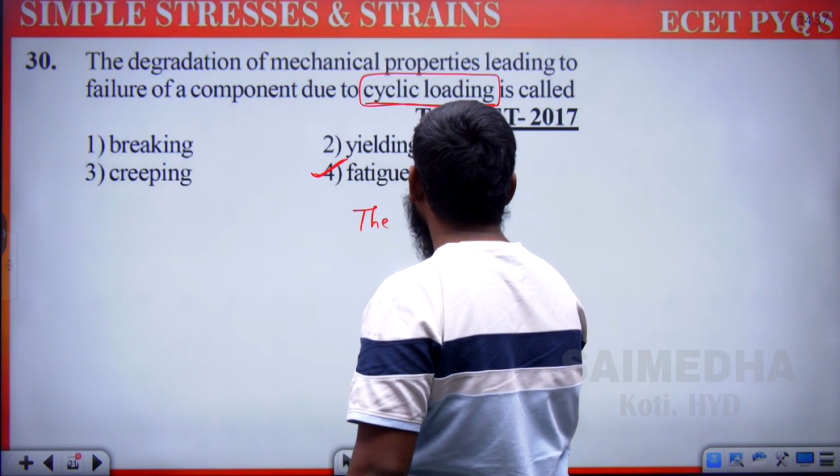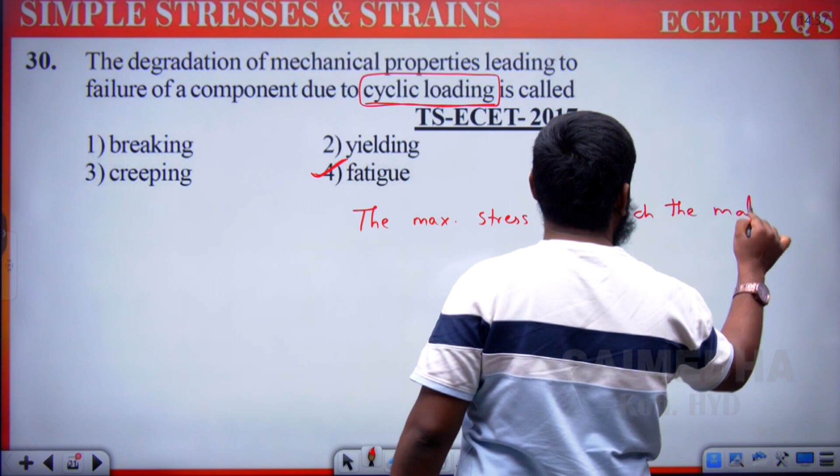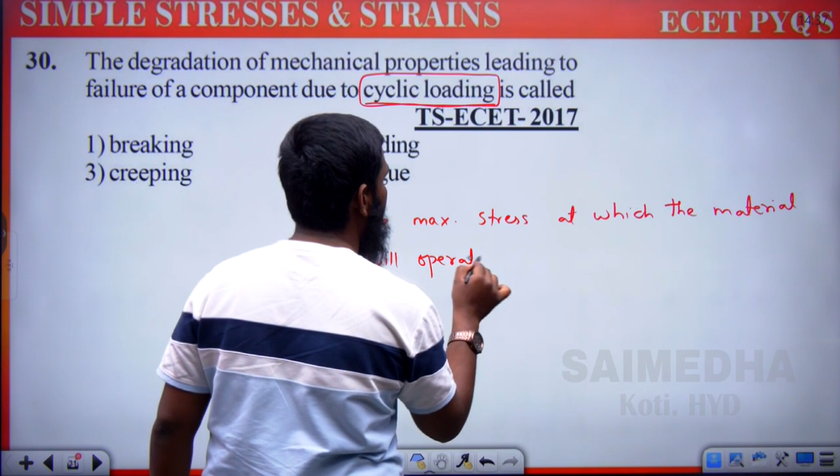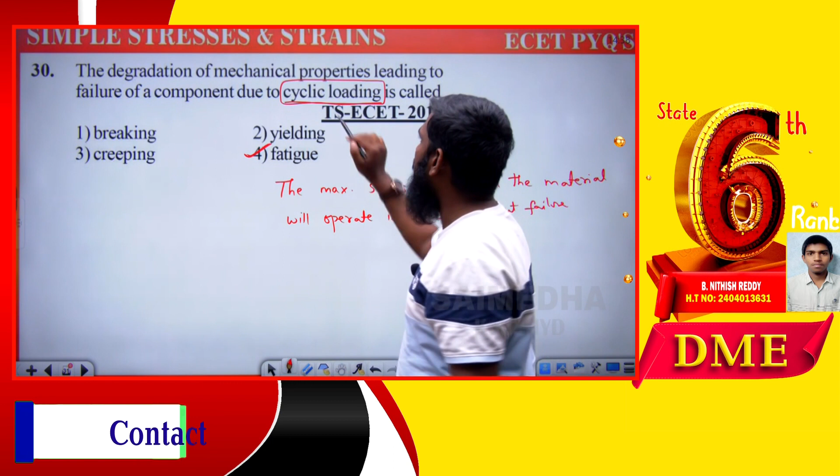We are calling this property fatigue. Or else we can remember the definition - fatigue strength. What is the definition of fatigue strength? It means the maximum stress at which the material will operate indefinitely without failure. Whatever this maximum stress is, we can write this as varying loads will be there. If you remember this definition, sometimes it will be given as varying loads, or if you have it as cyclic loading, whenever we have cyclic loading, directly we can go with the option fatigue.

Now let us go for the next question. A body having similar properties throughout its volume is said to be what? Now what we are having here is a body having similar properties throughout its volume. Suppose let us take an example.

Now we have taken a body as an example. In this direction let us take it as E1, this part we take as E2, and this part we take as E3. Similarly, one more point we take in this, we take it as E1, this is E2, and this is E3. So we are having the same elastic properties here.

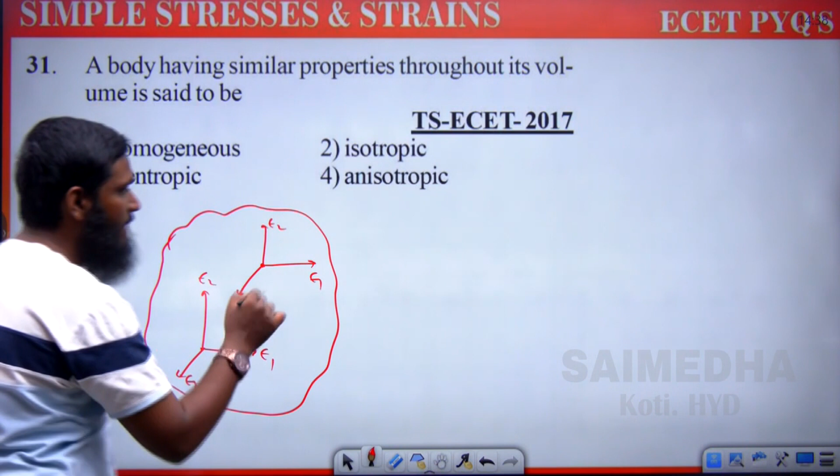We are having the same elastic properties in the direction. So it is depending on the direction but independent of the point. So it is similar properties we are having, having similar properties throughout its volume, so it is related to the homogeneous part. If this sentence is given - we are having the same elastic properties depending on the direction, independent of the point, or we are having similar properties throughout its volume - then we call it homogeneous. Isotropic is different.

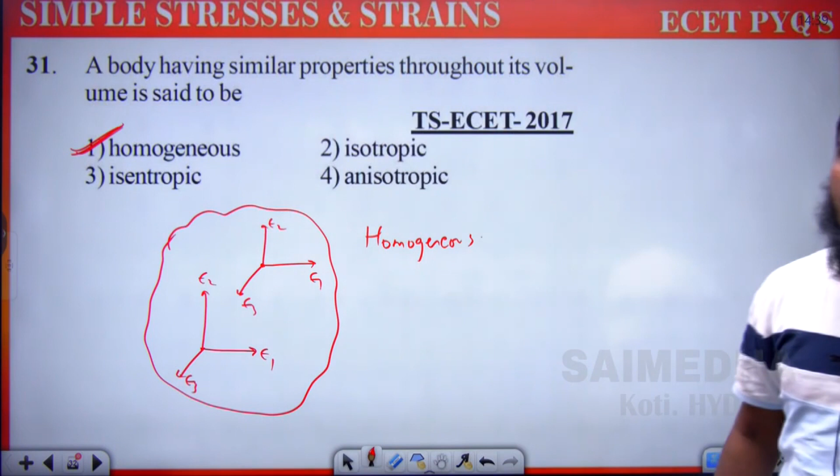We are having same elastic properties in all directions. Whenever we have same elastic properties in all the directions, then we call it isotropic.

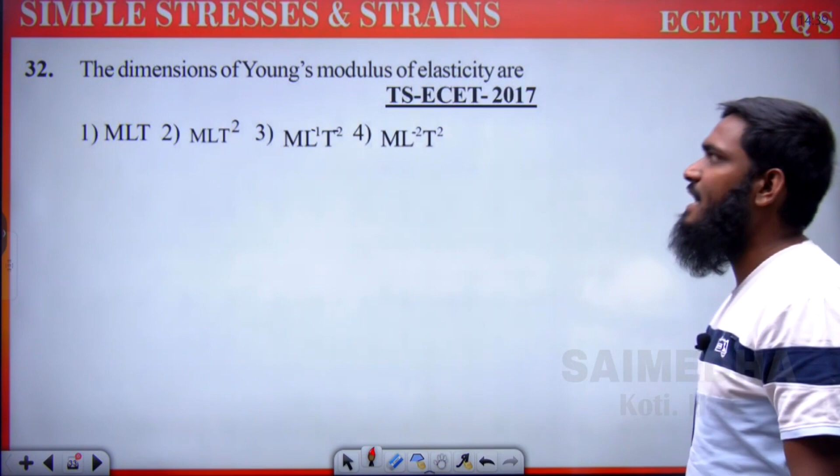Now next, the dimensions of Young's modulus of elasticity are - let us see this one, what are the dimensions. So Young's modulus of elasticity, what is the unit we are having? The unit we have is Newton per meter square.

Okay, so we have written the new units. After writing the units, with the help of the units, let us try to find out the dimensions we are having over here. Newton per meter square we have taken, but 1 Newton is equal to how much? 1 Newton is equal to 1 kg meter per second square.

What we are having? 1 kg meter per second square. Now let us substitute over here. In the place of Newton, we are writing 1 kg meter per second square. Then again in the denominator only, what we are having? Meter square we are having. So let us write this part as meter square.

Okay, so this 1 meter gets cancelled. Now what we are having? Kg we are having in the numerator, and in the denominator we are having meter and second square.

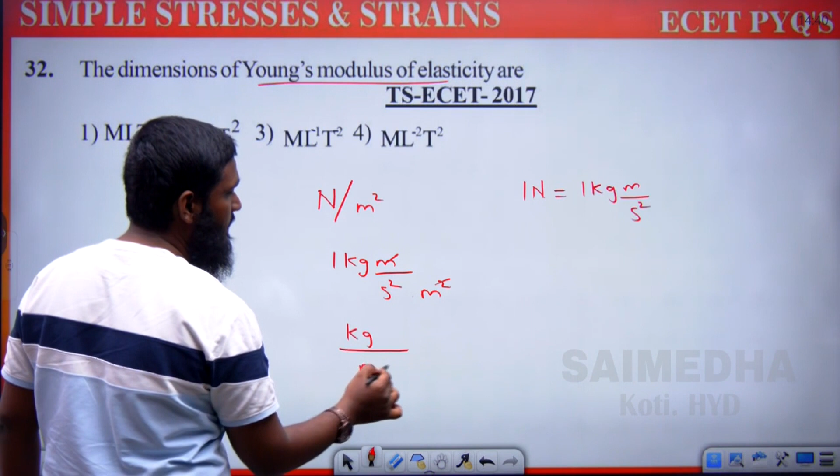Okay, now let us try to write this in mass, length and time over here. Now what we are taking? Kg means what we are having? Mass. So we have taken mass over here. What is the power we are having for this mass? Means 1. So we have taken 1 over here.

Now next, m we are having. M means what we are having over here? Meter. So if you are having meter, we have to take length. So we have taken length over here. But what is the power we are having over here? M power 1 is there. But if you want to write in the numerator, it will become L power minus 1.

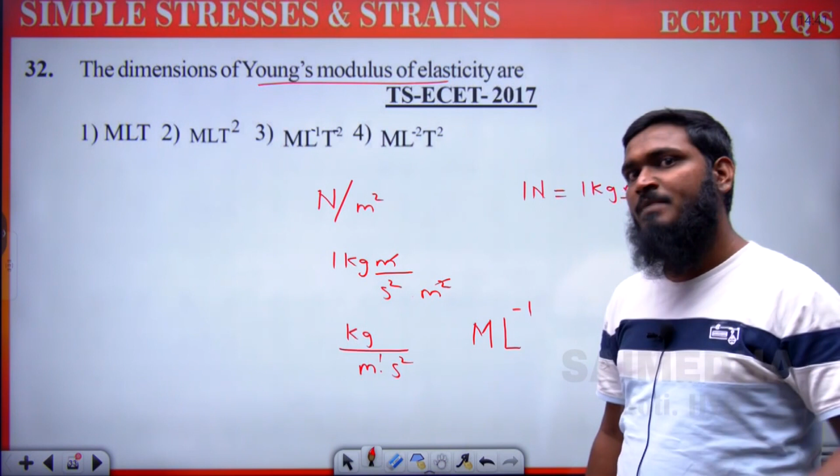Similarly, now S means what we are having? Second. Second square we are having. Second is related to time. So we have taken t over here. Now what is this number we are having? 2. Means if you want to write in the numerator, it will become minus 2. So these are the dimensions of what?

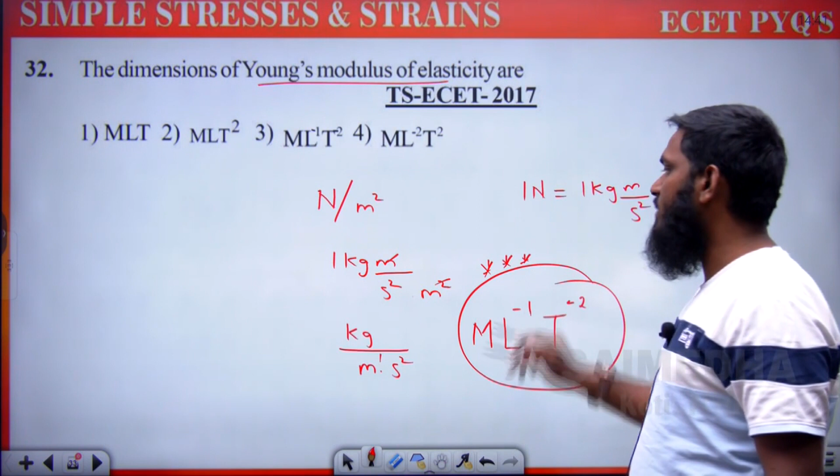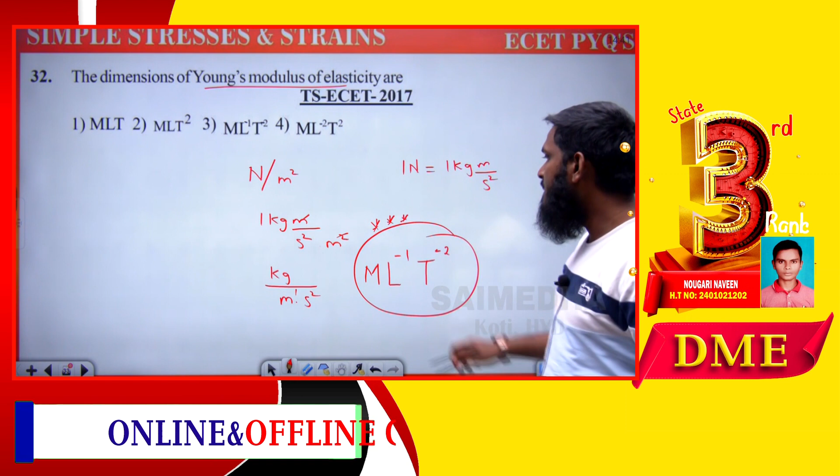Young's modulus or modulus of elasticity. So if you don't know the formula directly, with the help of the formula also we can write this part. So M L power minus 1, t power minus 2 will become the dimensions of Young's modulus. So which option is correct over here? M L power minus 1 t power minus 2. So option 3 is correct.

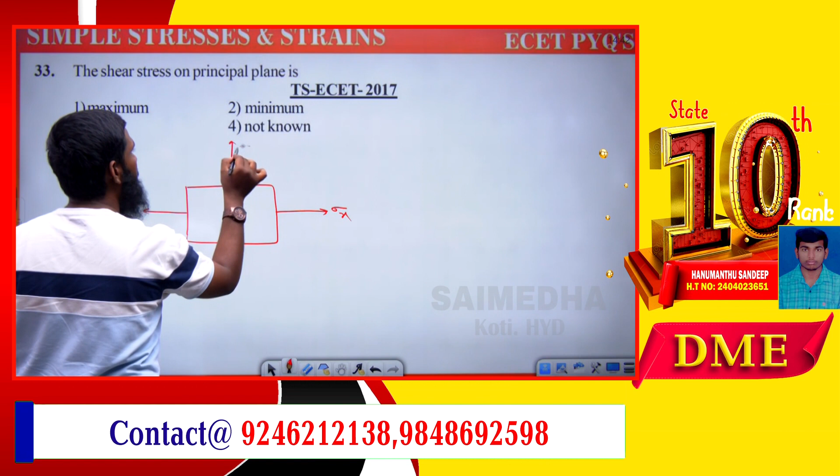Now next question, the shear stress on principal plane is - we have already discussed this part. Now listen here carefully. Suppose we have taken a body over here. Okay, this body we have taken. Now in this we are having normal stresses, sigma x we have taken, this is also sigma x. Now this is sigma y we are taking, this is also sigma y we are taking over here.

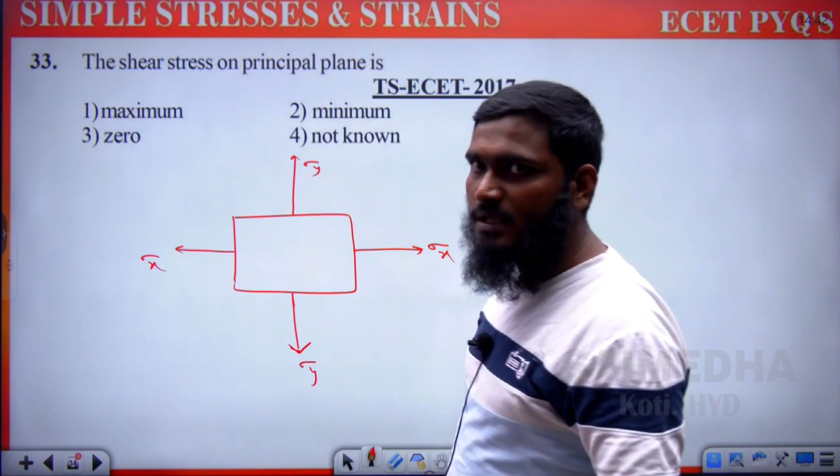What is the meaning of normal? Normal means which is perpendicular to the cross section. Yes or no? Perpendicular to the cross section means we have taken this part. Now if you are taking shear also, means shear means what? Parallel to the cross section. Parallel means what we are taking over here.

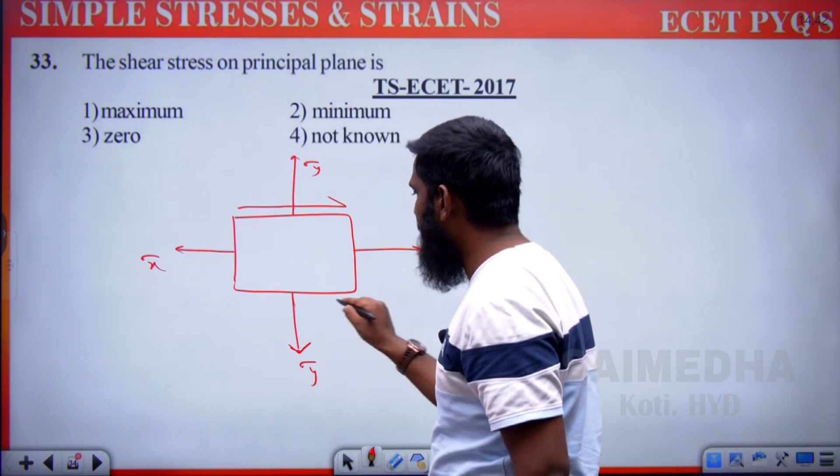Suppose we have taken like this. Okay, this part we have taken. So if it is moving in the right direction over here, another part we have to take as left direction. Okay, right and left we have taken. Now if you are seeing this part, right and left, so it is trying to rotate this body in the clockwise direction.

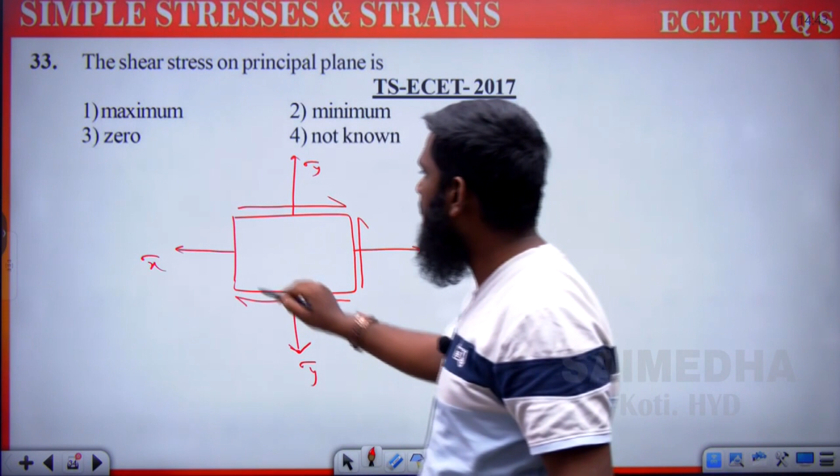If it is trying to rotate the body in clockwise direction, we have to provide the complementary shears which is opposite to that part, so the body will be in stable condition. Okay, so if it is clockwise, now we are providing anti-clockwise over here. So this upward we have taken, and over here what we have to take is downward. Okay, like this we have taken.

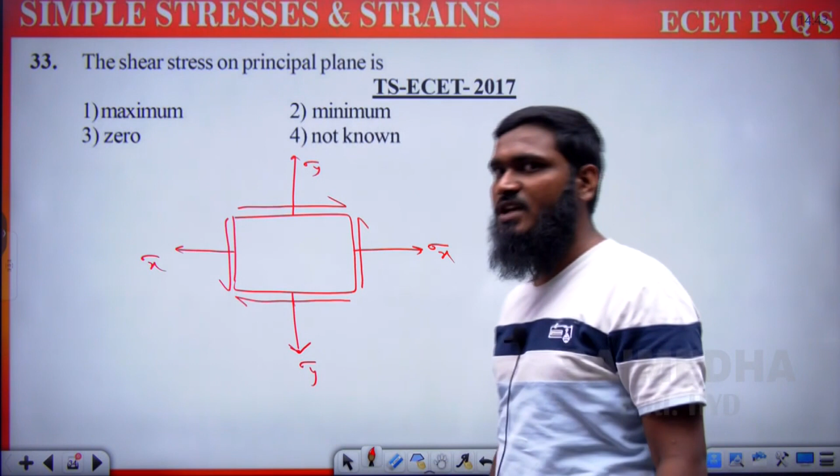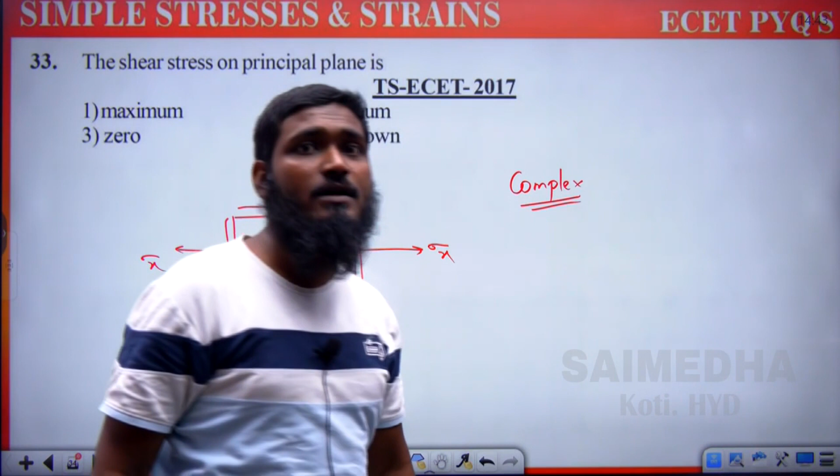So whenever in addition to normal stresses, if you are having the shear also, then we are calling it complex stresses. We have taken this part as complex stresses over here. Now in these complex stresses, whenever shear stress becomes 0, then we have to call it principal stresses.

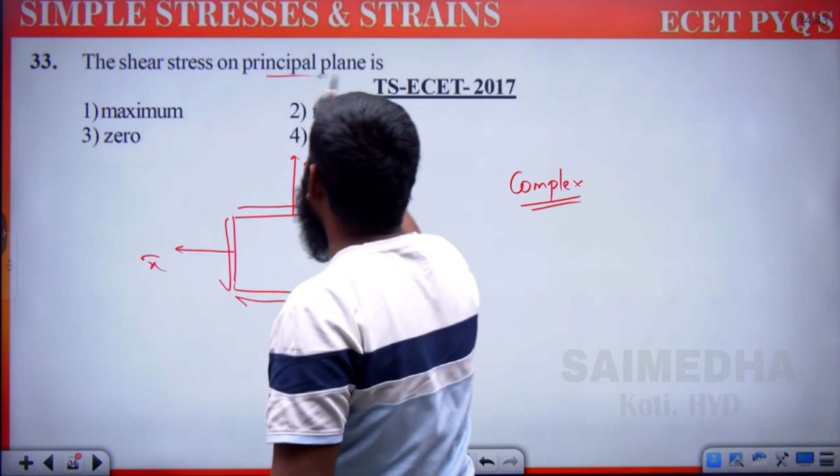Okay, now so over here also what we are having? Shear stress on principal plane, and that plane we are calling principal plane. Shear stress is 0 means we are calling it principal stress. That plane we are calling principal plane. So shear stress on principal plane will be equal to 0. 0 means what?

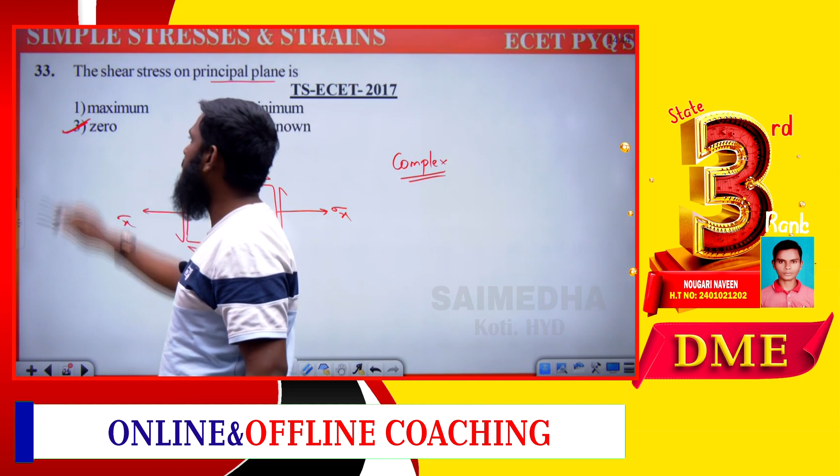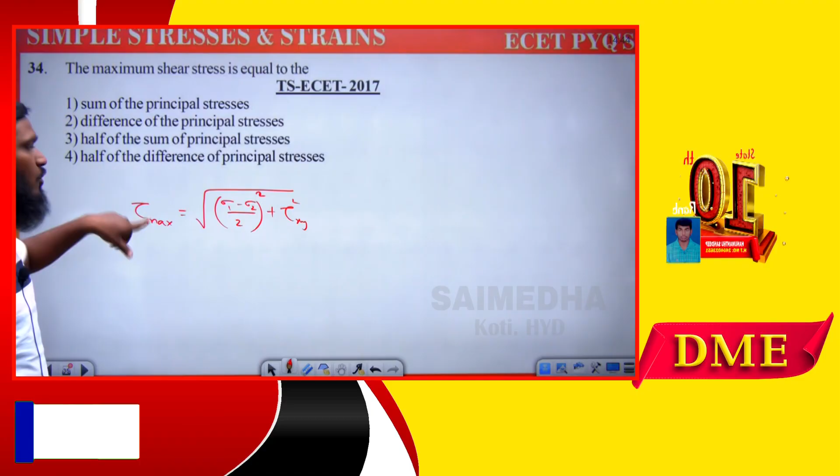Option 3 is correct. Now the maximum shear stress, tau max, is equal to under root of sigma 1 minus sigma 2 divided by 2, whole square, plus tau square xy. But here it is asking about maximum shear stress, and we are not having any tau value. If you are not having any tau value, this part becomes 0 and the square root gets cancelled. So tau max is equal to sigma 1 minus sigma 2 divided by 2.

What is the meaning of sigma 1 and sigma 2 actually? We can also write it as sigma maximum minus sigma minimum, maximum minus minimum divided by 2. Sometimes it will be given in maximum or minimum words, or else it will be given as normal principal stresses only. Let us see this one.

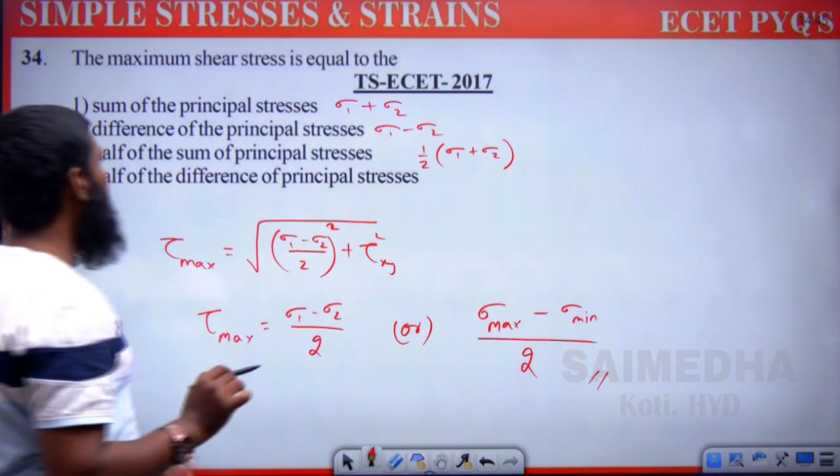Sum of the principal stresses means sigma 1 plus sigma 2. Difference means sigma 1 minus sigma 2. Now, half of the sum of the principal stresses means sigma 1 plus sigma 2. Similarly, half of the difference means sigma 1 minus sigma 2, half meaning divided by 2. So we get the answer sigma 1 minus sigma 2 by 2.

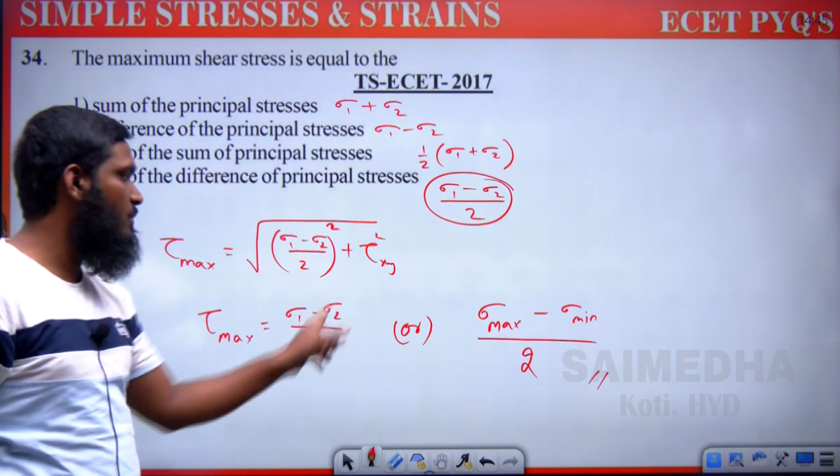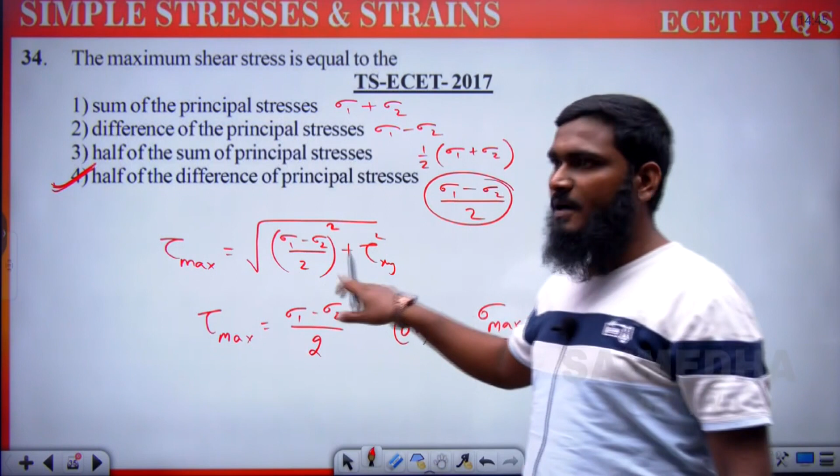So let us go with the fourth option. Directly we can remember that whenever we are having maximum shear stress, the main formula is this one. But if we substitute some value, considering only principal stresses, tau value equal to 0, then we get the answer as half of the difference of the principal stresses. We can remember this part directly.

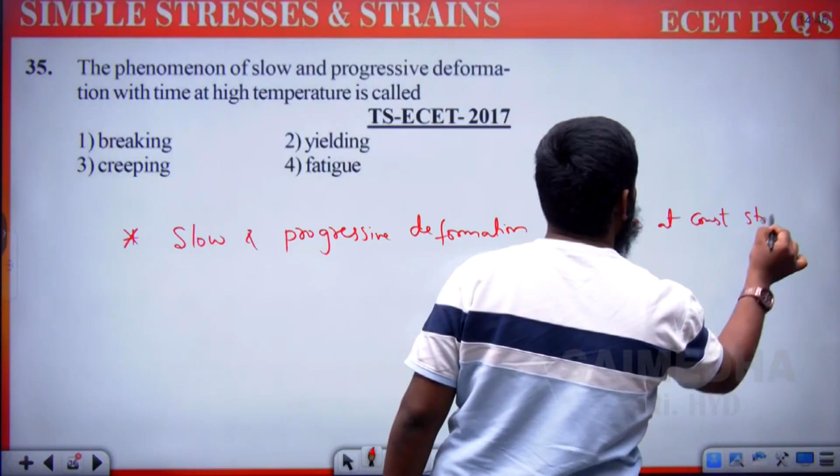Now let us go with the next question. The phenomenon of slow and progressive deformation with time at high temperature is called what? Listen carefully, we have already discussed this part. The definition is: slow and progressive deformation with time at a constant stress, we are calling it what?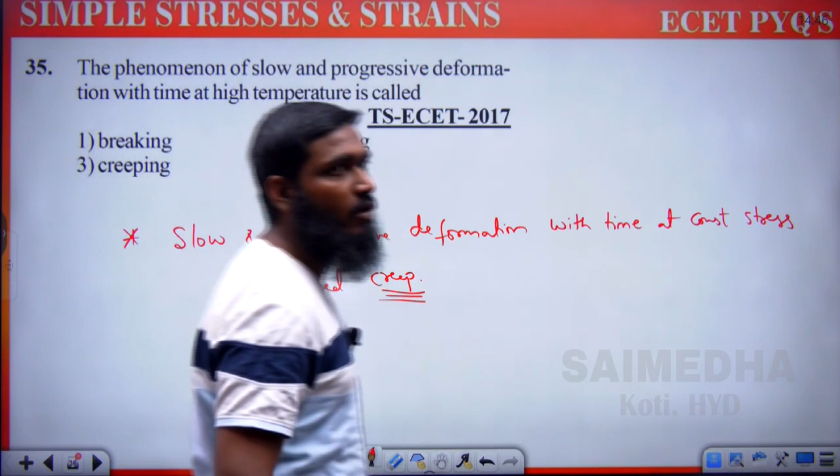It is called creep. This question has already been repeated here. So the phenomenon of slow and progressive deformation, directly we can go with the third option, creep or creeping.

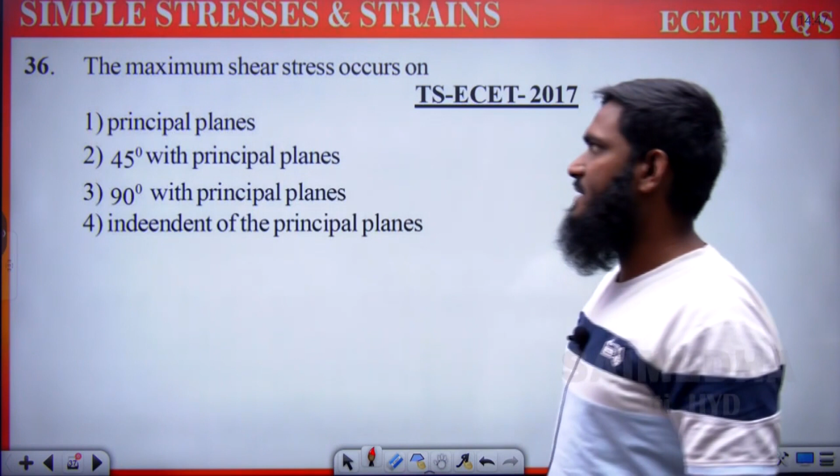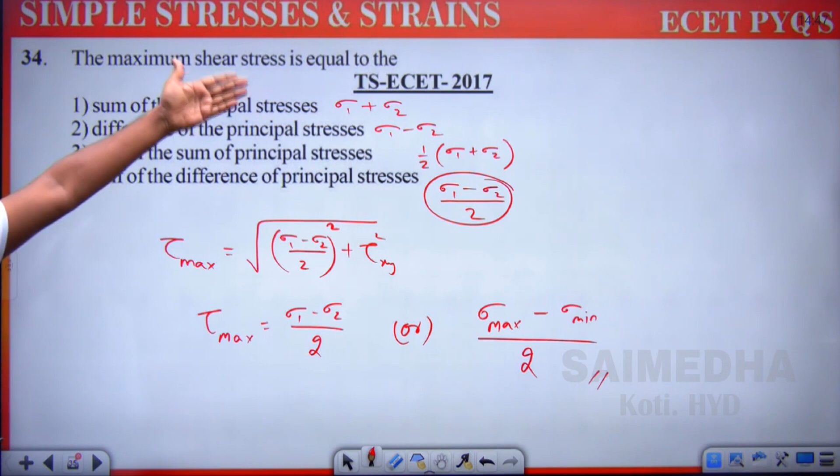Now next, the maximum shear stress occurs on principal planes: 45 degrees with principal planes, 90 degrees with the principal planes, or independent of the principal planes. Let us see this part. The maximum shear stress, it is occurring on... Over here what we have discussed, maximum shear stress is equal to, we have taken this part, but here we are asked where maximum shear stress occurs.

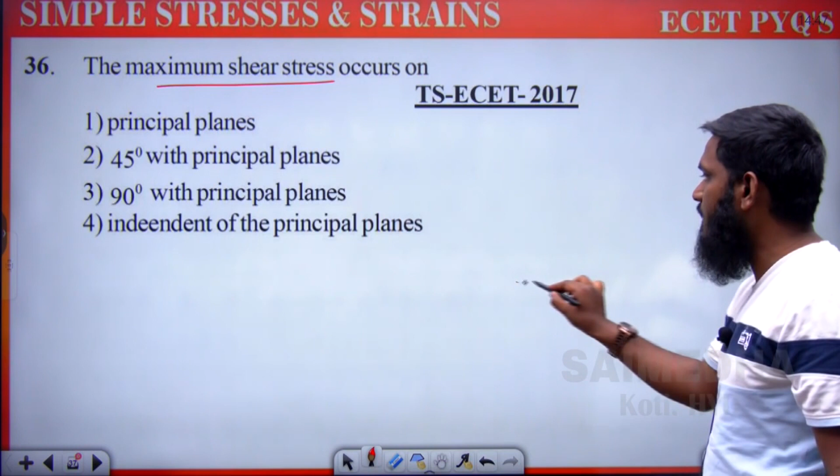As you have already seen in the video lectures, suppose this part we are taking as principal plane 1. Then we will be having another principal plane also, let us take this as principal plane 2. The angle between principal plane 1 and 2 is equal to 90 degrees.

Now for this plane, whatever normal we are taking here, this part becomes a maximum. Normal stress becomes a maximum. Similarly, whatever shear part we have taken, we are not having any shear. If we are not having any shear, then tau is equal to 0.

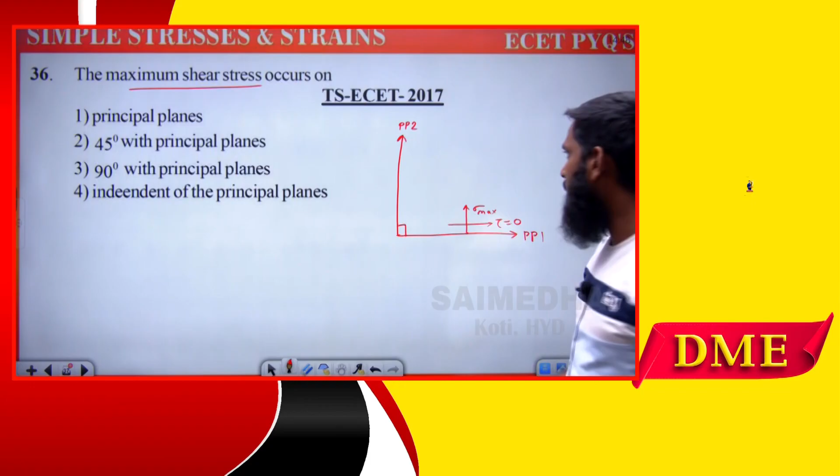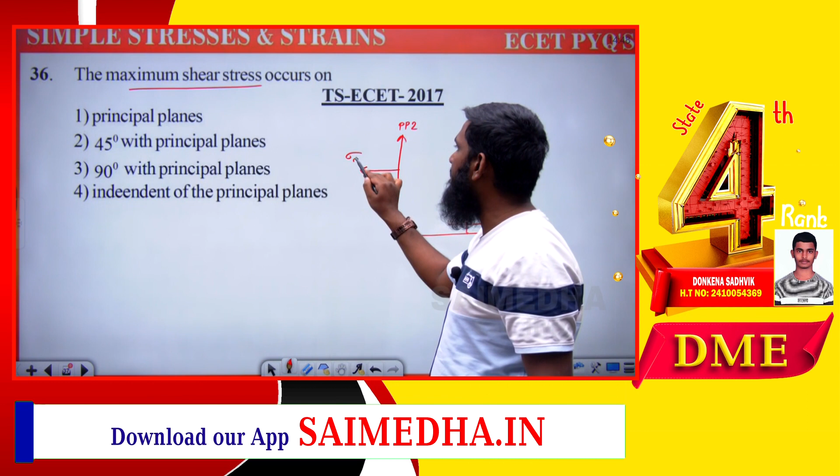Similarly, on principal plane 2, whatever the normal means, perpendicular should be there, so that's why we have taken perpendicular. This is also a perpendicular. If you are taking perpendicular here, this part becomes minimum. And here also, tau value is equal to 0.

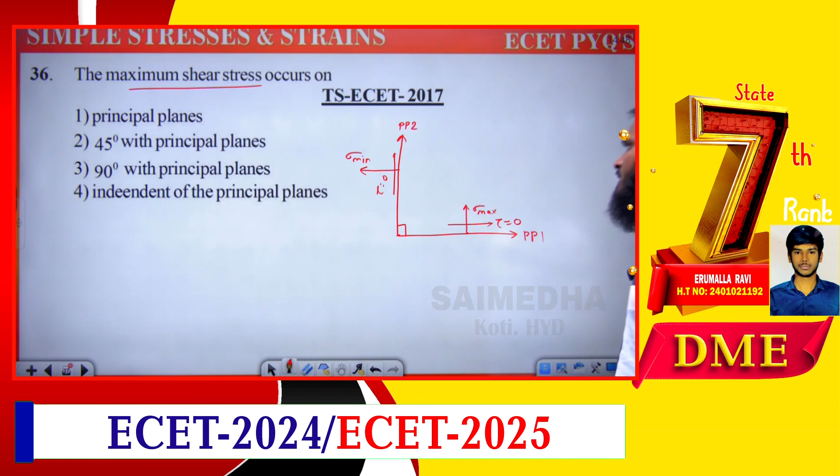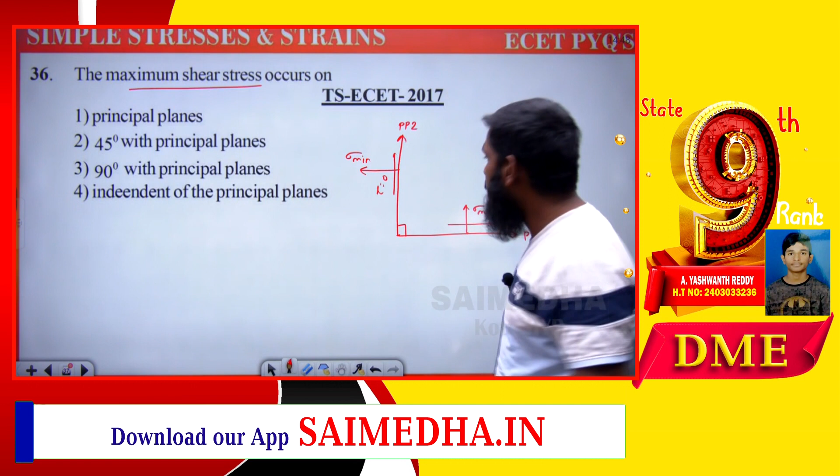Now next, principal plane 1, principal plane 2 - but if we are taking these principal planes, we get tau value equal to 0. What do we have to find? We have to find maximum shear stress. So we will be having shear planes also. This we are taking as shear plane 1, and similarly this part will be shear plane 2.

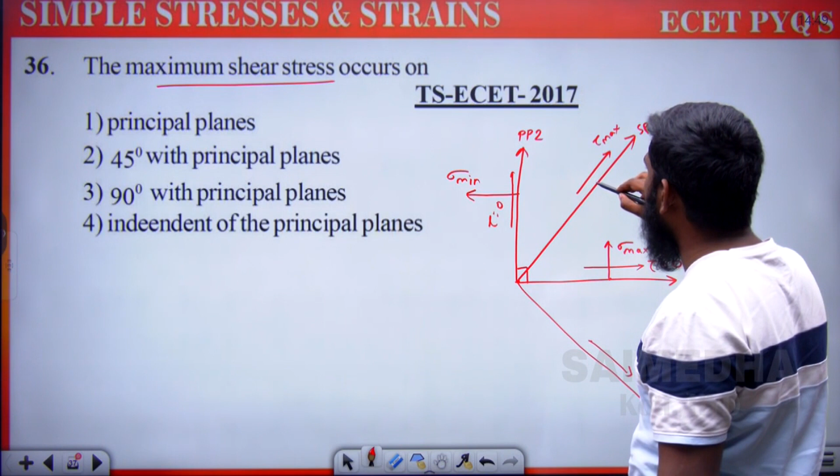So shear plane 1, shear plane 2 we have taken over here. Whatever shear we are having over here will be tau max, maximum shear, in the shear plane. Similarly over here also we will be having a maximum shear stress. What about normal? Let us take this part as sigma n, perpendicular to the cross section.

Now, what is the angle between principal plane 1 and principal plane 2? It is 90 degrees. Similarly, what is the angle between shear plane 1 and shear plane 2? It is also 90 degrees. But what is the angle between principal plane and shear plane? It is 45 degrees.

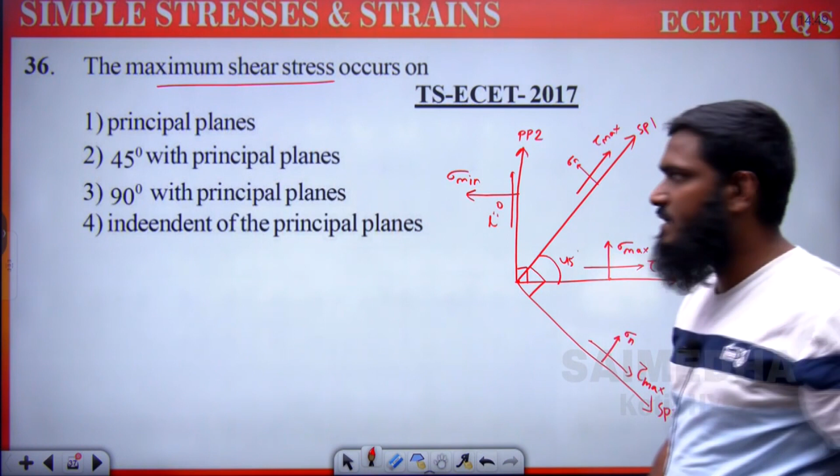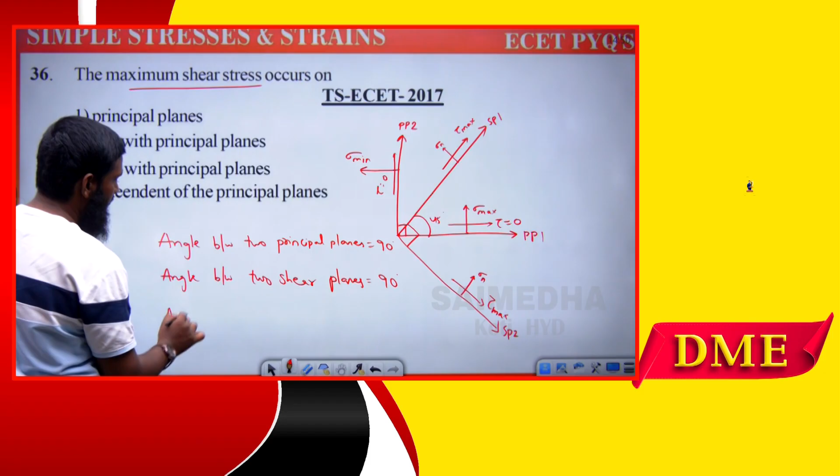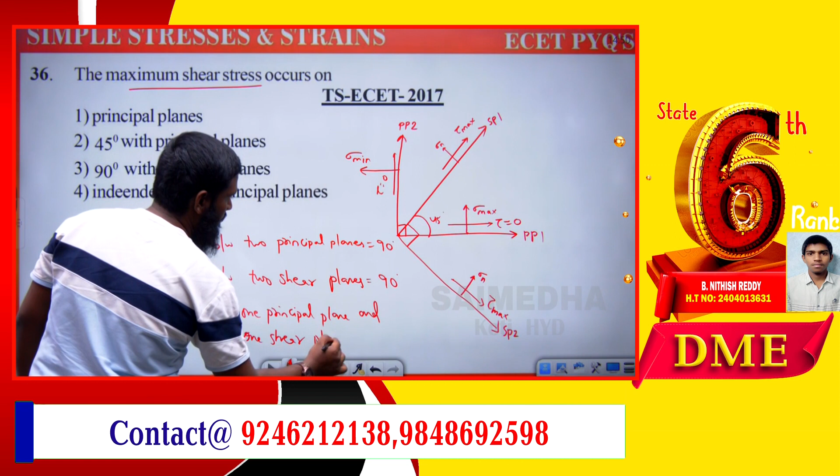This is the most important point we have. Angle between two principal planes is equal to 90 degrees. Similarly, angle between two shear planes is equal to 90 degrees. Then, angle between one principal plane and one shear plane is equal to 45 degrees.

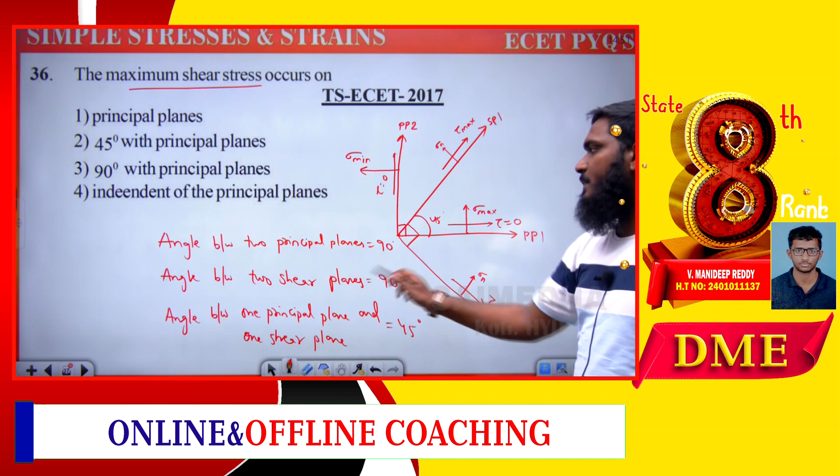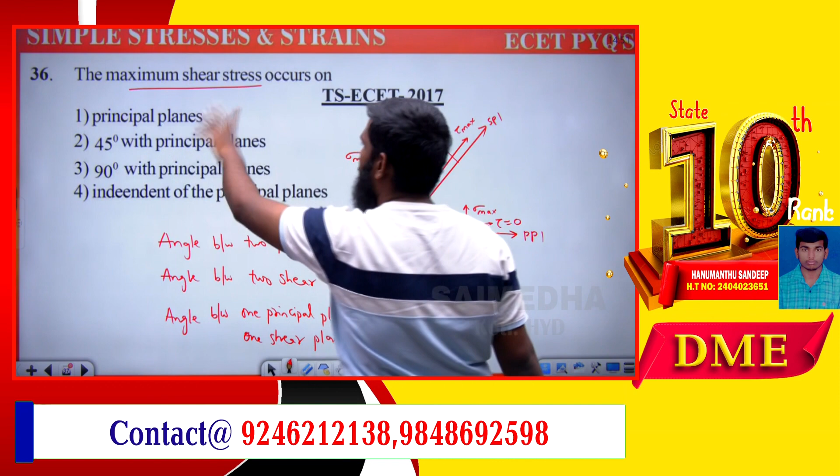We have taken this part. Angle between the two principal planes is 90, two shear planes is 90, and one principal and one shear plane is 45 degrees. So the maximum shear stress occurs on principal planes - that is the wrong answer; it is 45 degrees with the principal planes. If you take this shear plane, it is at 45 degrees, or if you take this other part, it is also at 45 degrees. So at 45 degrees to the principal plane, the second option is correct.

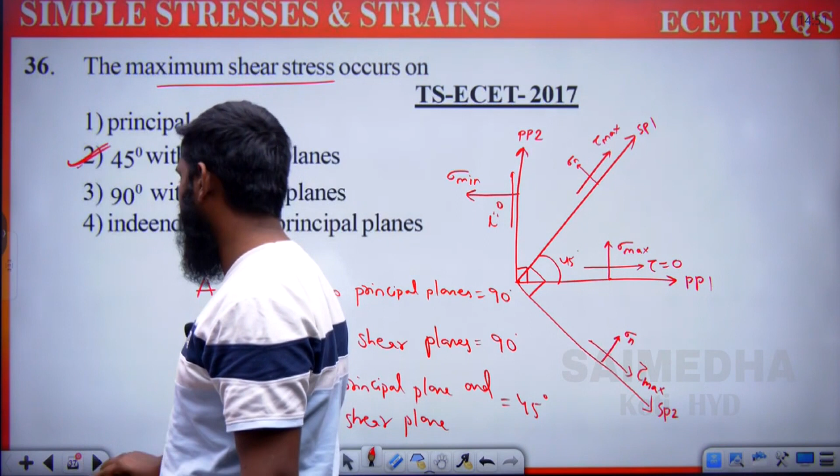Now next, a bar of length L meters extends by A mm under a tensile force of P. The strain produced in the bar is? Now listen here carefully, we have to find out the strain. What is the strain formula?

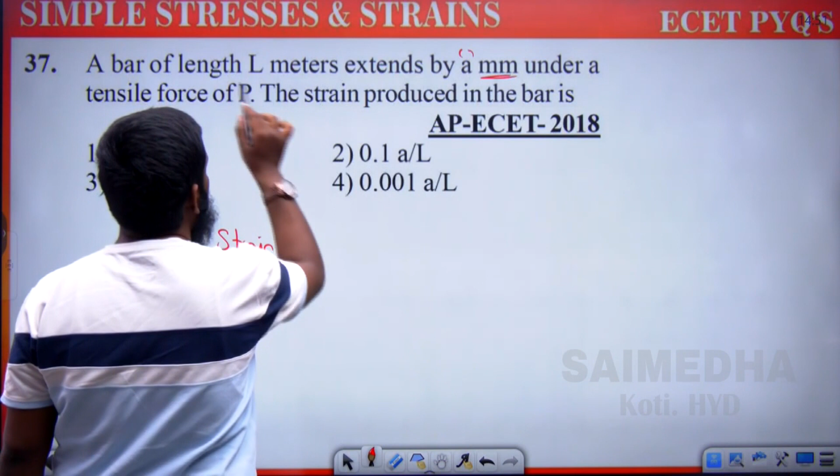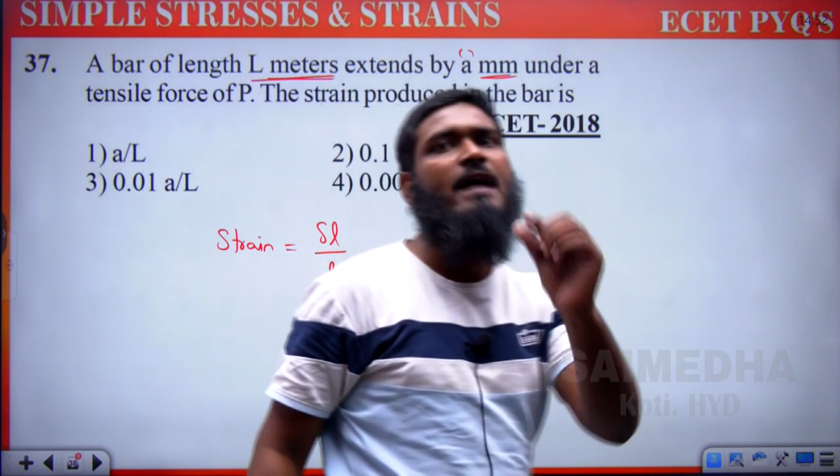Change in dimension by original dimension. As it is given length over here, let us write delta L by L, so we are writing L only - this part is L meters. But this delta L value is given in mm, A mm. A means some value in mm. But if you want to convert from mm to meter, what do we have to do? We have to divide by 1000. So A divided by 1000 we have taken over here. A divided by 1000 means what can we write now?

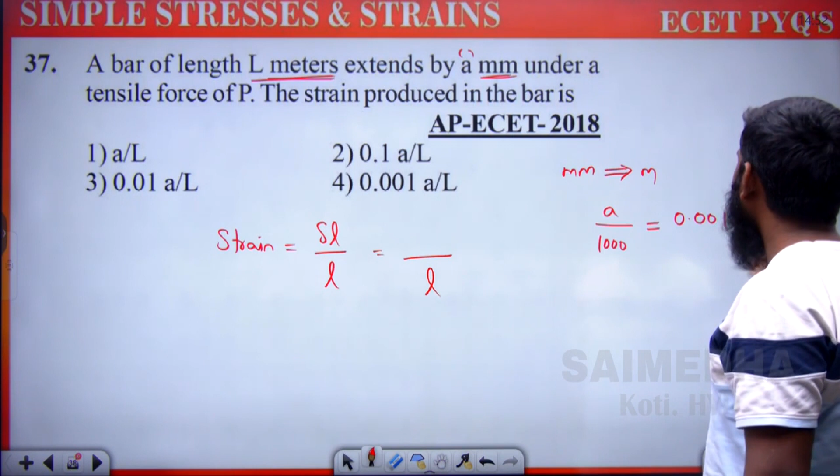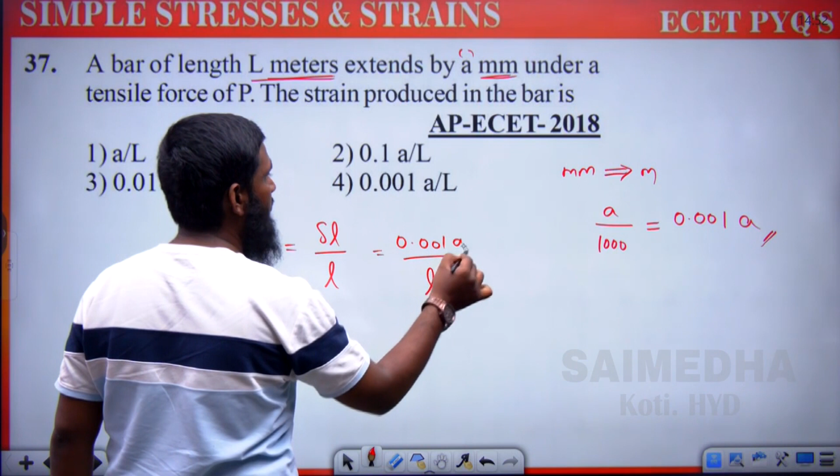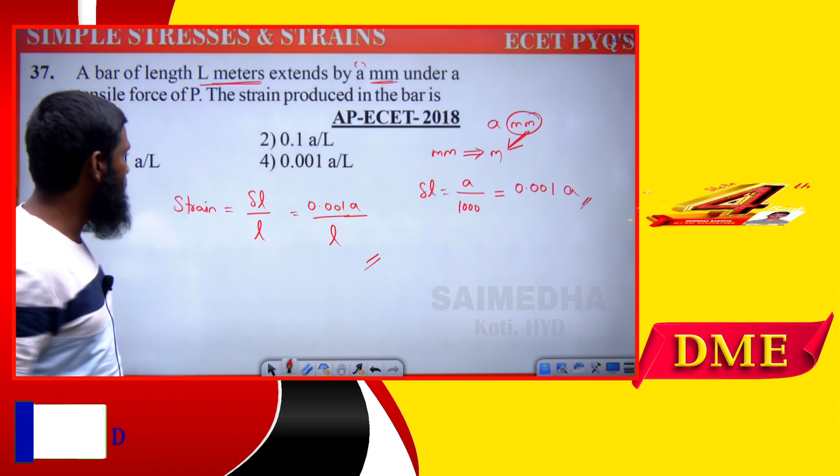0.001 A. So this is the delta L value, given as A mm which we have to convert into meters. So A we have written as it is, and mm to meter means we divide by 1000. So we get 0.001 A, and delta L by L is equal to the strain. So which option will be correct now? A by L, 0.1 A by L, 0.01, 0.001 A by L - so the fourth option is correct. Now let us go with the next question.

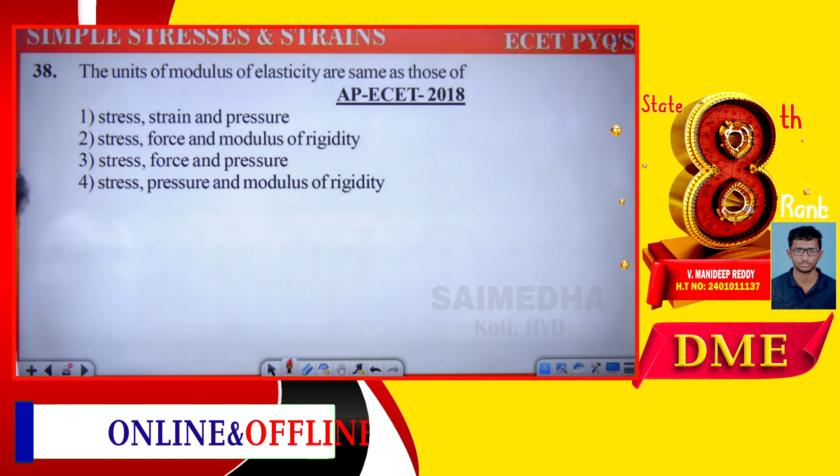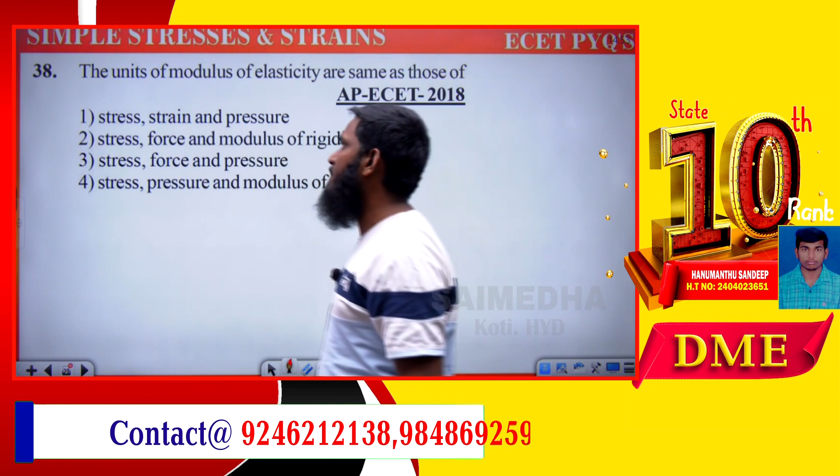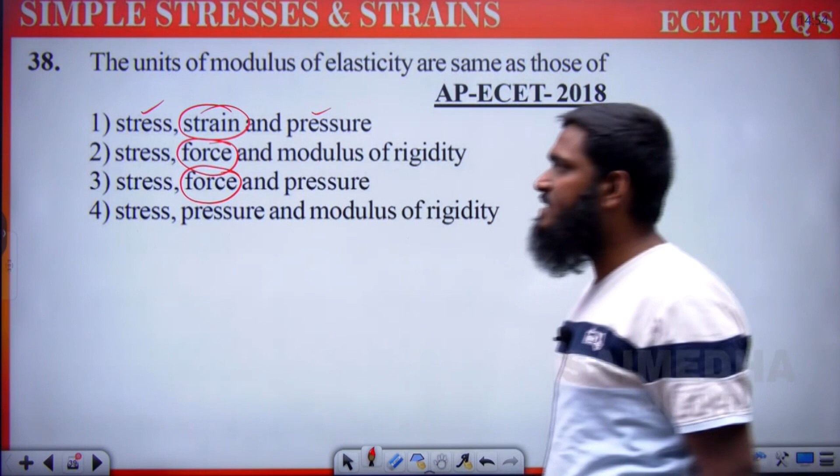The units of modulus of elasticity are same as those of stress, strain and pressure. The stress and pressure units can be same, but strain does not have any units. Similarly stress and modulus of rigidity can be same, but force units are newtons - force is newtons, stress is newton per meter square, but force is newtons, so this is also wrong since units are not same. But stress, pressure and modulus of rigidity - all three will have the same units, newton per meter square.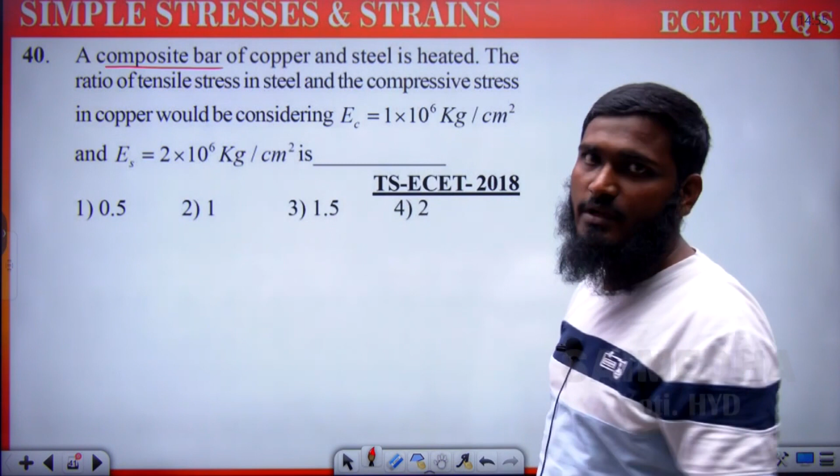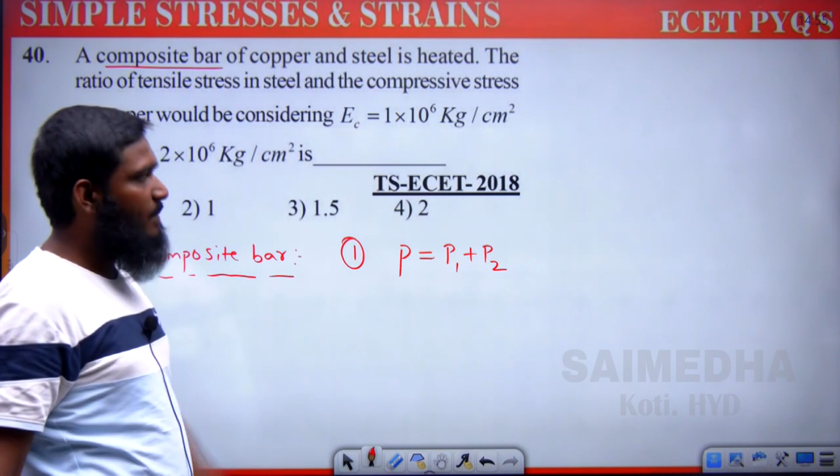Now for composite bar we are having two conditions. Let us discuss that carefully. First condition: P is equals to P1 plus P2. Total load is equals to the algebraic sum of the individual loads. If you have taken two materials, P1 plus P2; if three materials, P1 plus P2 plus P3, and so on. So this is the first condition we are having for the composite bar.

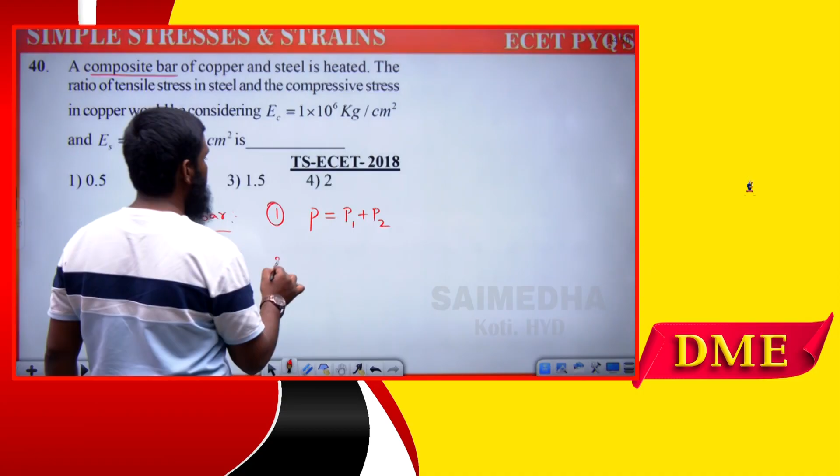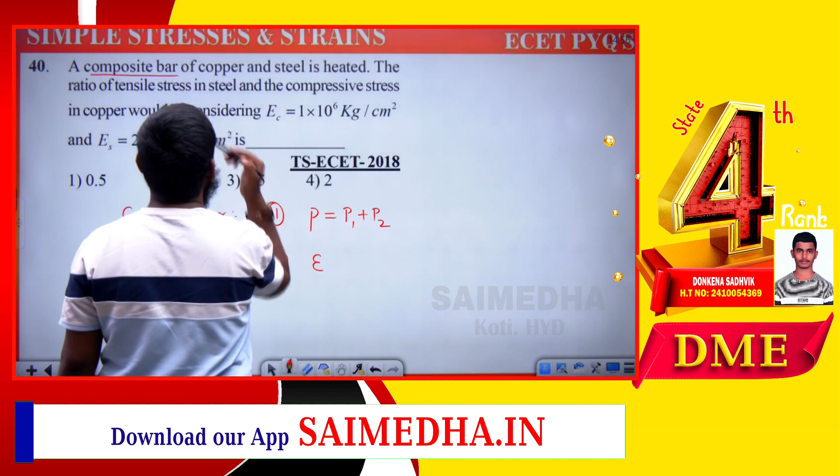Now the next condition: whatever the strain will be, the strain of both the materials will be same. So whatever strain we are getting in steel is equals to the strain we are getting in copper. These are the two conditions we are having in composite bar.

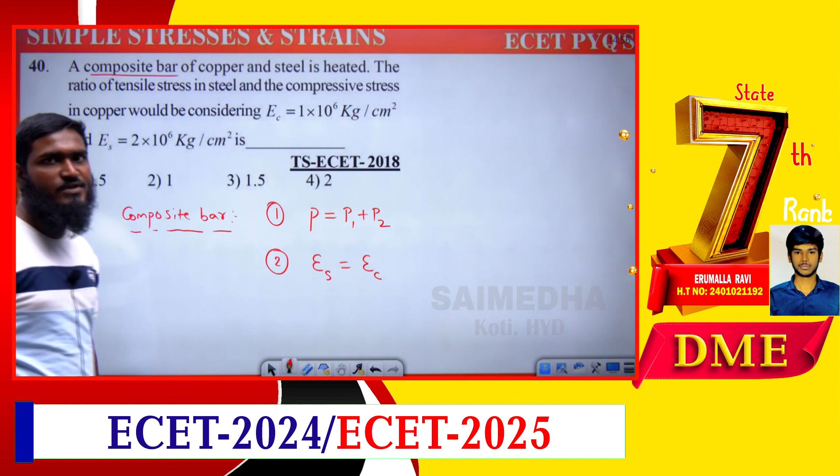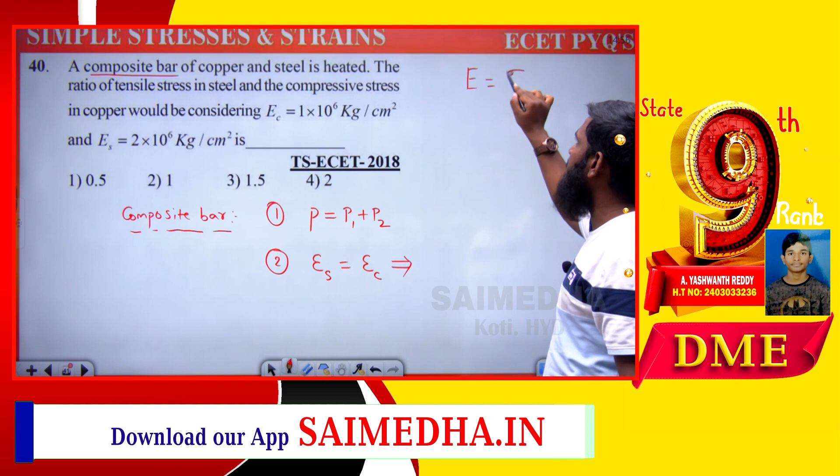Now let us discuss what we are having over here. What is the formula for strain? E, modulus of elasticity, is equals to sigma by epsilon. If you send this part, epsilon is equals to sigma by E. Now using this formula, in place of epsilon we can write sigma by E. So sigma S divided by ES, which is equals to sigma C divided by EC.

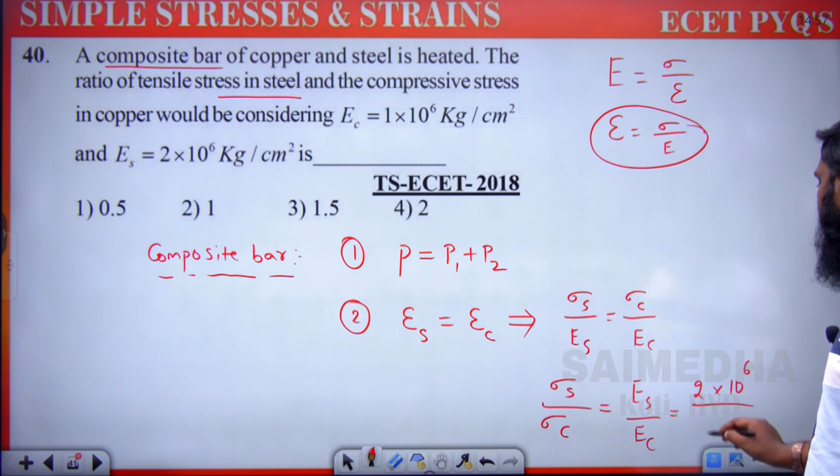So what we have to find actually is the ratio of stress in steel and stress in copper. We are taking stress in steel divided by stress in copper, which is equals to, sending ES part over here, ES divided by EC. Now let us substitute the values. ES value is 2 into 10 power 6, divided by EC value, 1 into 10 power 6. The 10 power 6 gets cancelled and it is equals to 2.

So what is the answer we are getting over here? The ratio of tensile stress in steel and the compressive stress in copper is equals to 2. So let us go with the fourth option, which is equals to 2.